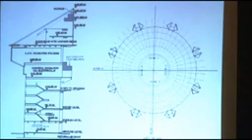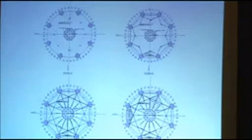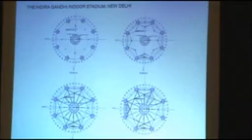We are a structural engineering firm about 45 years old, and some of the pictures you'll see will be very old. This is the 1982 Asiad Games Indraprastha Stadium. We show this slide in every presentation, we are proud of this structure. You can see the form, beautiful, symmetrical, architecturally driven. Any architectural mathematical form is self-standing, and we have to recognize its potential for stability and strength and use it. That's what a structural engineer should do.

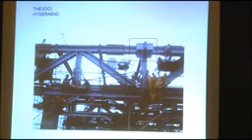This is ICICI Bank at Hyderabad, one of the largest office buildings in India, I don't know whether it is in Asia. It consumed about 32,000 tons of structural steel, a very large building.

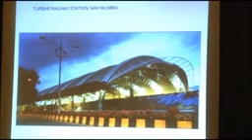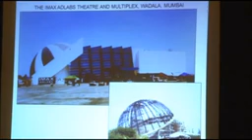You can see some boring pictures as well. This is a night view when it was being constructed, Turbhe railway station you saw one picture earlier. In a span of 40 years, we must have designed at least 300 large, important structural steel buildings. It's difficult to show all of them here.

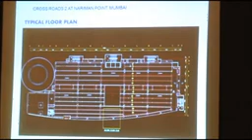This is one of the new buildings, Peninsula Business Park at Parel. Crossroads 2, in front of Mantralaya, has a lot of structural steel in it as well. The National Sports Complex at Worli.

Very early buildings, the stock exchange. This building used composite column construction, and in those days we had used steel blooms, 8-inch by 8-inch solid steel bloom as an embedded section in this building. Very difficult detailing to connect the steel beams and columns.

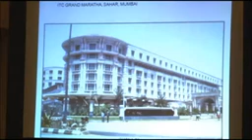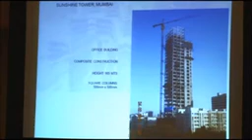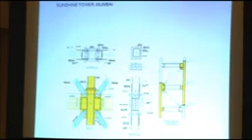PSL Holdings, manufacturers of steel pipes themselves, wanted to build their own building in steel. And this is a very well-known building in Mumbai now at Dadar, Sunshine Tower. You can see during construction the floor plate, the bracings.

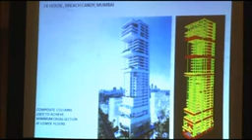So we can make some details like this, and this is how it looks. The architect fortunately wanted to express the structure, and we were happy about it.

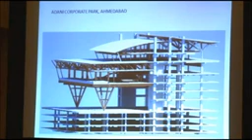JK House also has composite construction in it, Mukesh Ambani's building. The annex of India Bulls is also built in structural steel because the building premises were up and running, and they didn't want to disturb the premises with RCC construction work.

This is a very unique auditorium we are doing for Adani Corporate Park at Ahmedabad. And this is the latest we are engaged in, the Dhirubhai Ambani Convention Center, involving about 20,000 tons of structural steel.

So having established my credentials that we are into steel, now I want to make a small point. Steel as a structural material is presently used in some areas like large span roofs, some iconic buildings promoted by government organizations like CIDCO, railway stations, convention centers, but somehow its use is not as much as the industry wants it to be in the housing sector, commercial sector. There are very few office buildings or residential buildings done in structural steel.

And why? I think Mukesh also is engaged with me in some promotion of structural steel for residential and commercial buildings over the last few years, and from that we have got some learnings.

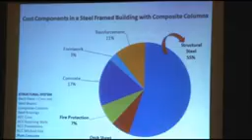And that's a disadvantage, not many people can do that. And then there's disciplined geometry. It's not here, but that's the point of my discussion today.

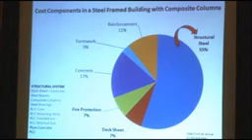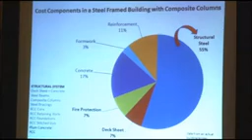When it comes to cost, you can see this typical pie chart of a common steel building, let's say a commercial building. You have composite columns and steel beams, deck sheet, pour concrete on top of deck sheet. Only the foundations, and maybe retaining walls if it has a basement, are in concrete. Now 55% of cost goes into structural steel. Add the cost of deck sheets and fire protection, it's about 70%. Now this is where the problem is.

This cost is prohibitive, the cost of steel is very costly. To achieve a desired performance out of a structural member, if you design that member in concrete versus the same in steel, steel will be quite costly. And that's the problem.

So what do we do? First of all, buildings cannot all be designed in steel. That is the truth. There is a certain class, like I said, geometry is important. Only some buildings can be designed in steel, and even in those buildings, not everywhere can you use steel. You can build a component, a part of that building, in steel. You have to identify that.

In order to learn these things, structural designers and architects have to think steel. For every building, every proposal that comes to us, we try to make an alternative structural solution in steel. And still, even if we produce all the alternatives and make comparative statements, the success rate is very low.

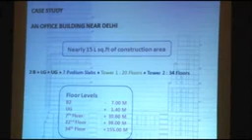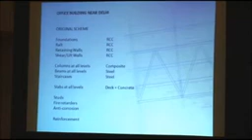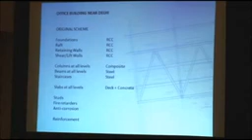Let's see the case study. This is a case study of a building about 15 lakh square foot of area near Delhi. I'm mentioning Delhi because it's zone 4. It's a tall building—you can see 34 floors, one tower going high up. And you can see the graphics—I took a lot of pains to have that background. I was afraid it was not going to come out, but I'm successful.

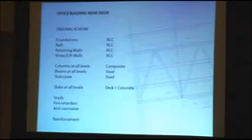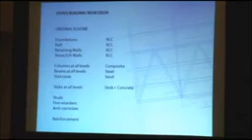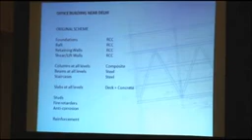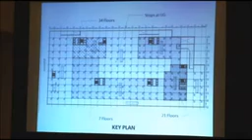As usual, as if it is a usual tender, we went ahead with designing a steel building with composite columns. Of course, foundations, raft, retaining walls, and shear walls we took in RCC. It's a very slender building, so we had to depend on RCC shear walls for lateral resistance. Beams would be in steel at all levels, staircases also in steel, slabs, deck and concrete, so a perfect steel building. And then of course studs, fire retarders and anti-corrosion reinforcement, all those items are there.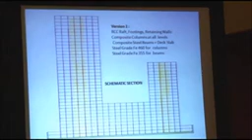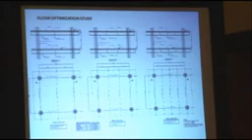So when we started the design, as I told you, these are the components: steel grade FE 460 for columns and 355 for beams. And of course we used the UB-UC sections, not ISMBs. We did some optimization studies. One of the exercises we did was one beam in the bay, 2 beams in the bay, 3 beams, and which combination gave us the least cost, because as the span reduces, even your deck sheet cost reduces, the thickness reduces. So we did all this and arrived at some optimum configuration as thought by us, consulting engineers.

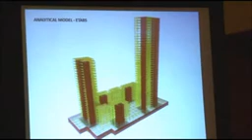Remember this. We went into detail. Remember, this job has come to us from a contractor, and if he gets the job, he is going to build it as it is approved by the developer. So this is an analytical model. We did detailed analysis and came up with all sizes. Did quantification very in detail. All columns, beams, RCC, everything.

And we came up with a very nice figure of 1,350 rupees a square foot for structure. We were very happy. What a design, very efficient design, structurally very economical. But what happened? When this data went to the contractor's office, they said, what is 1,350? We have our own costing system and our figure is coming to 1,530 rupees. I thought they were making a mistake, some switch. So I asked them, is it 1,530 or 1,350? They said 1,530. So I was interested, curious, why?

So I went there to their office. We sat, we had meetings, and there were regular meetings happening. The first meeting we were only discussing when are you going to give the drawings, now you are giving the drawings, when is the BOQ coming, all that sort of thing.

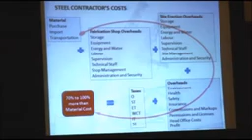They had so many things on their agenda - material cost, purchase, import, transportation. In fabrication, there is storage cost. There are equipment, energy, water, labor - the list is big. Then there are taxes: octroi, two STs I don't know, one must be service tax, other something, but excise and work contract tax and income tax. Then overheads, environment - I don't know what environment means exactly, it can mean two different things, but that cost is there. Health, safety, insurance, all these things are there. And if all are added, the cost goes up to 100% of the material cost or more than that.

Now this is just unimaginable for a structural consultant. And all these were valid costs.

They had experience, they had the rates with them, they had working, everything was with them. At the same time, I told them, boss, I have my problems also. They said, fine, we have got so much cost, now can you reduce your quantities? I said, I have got these problems.

I got code to follow. There's a performance criteria, deflection and acceleration and all that. Contractor doesn't know acceleration, probably he doesn't stay in a tall building. He doesn't know how the building sways. But I have to follow it. Then there is headroom, very important issue in steel buildings. Column spacing, of course it was given here. All these things I have to follow.

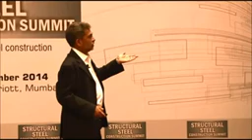Now this is the equation that the developer will write on the paper: 1.5 years of saving in construction time. What is the finance cost and all other costs, early returns? I mean, he doesn't have to think. He has to go for steel building. There's no doubt about it.

But this exercise has to be done like this. For 900 and 1500 rupees, he doesn't think again, he will go to concrete, because that 600 rupee difference is a very, very big factor. But 300 rupees is a thinkable factor. It's a premium, but manageable.

So what were the key achievements in this exercise? The mutual understanding between contractor and consultant. The entire exercise, remember this is very important, coming to a feasible design in just 45 days.

Because the owner is shouting there, I want the quotation, and he has called the contractor to quote only after his architectural design is frozen, and now he is ready with his equipment to do excavation. He doesn't have time. So this is the driving factor - I am the contractor, a commercial man, he will drive us, he will drive me as a structural engineer to produce designs and BOQs and everything. The owner lacks this. The owner appoints us, then he himself goes through so many iterations of designs and costs.

He also says the bulldozer is waiting there, but it doesn't interest me. Things can change if the owner is handling that part. When the contractor is handling the part, I'm sure he's going to get it done. So that is a change.